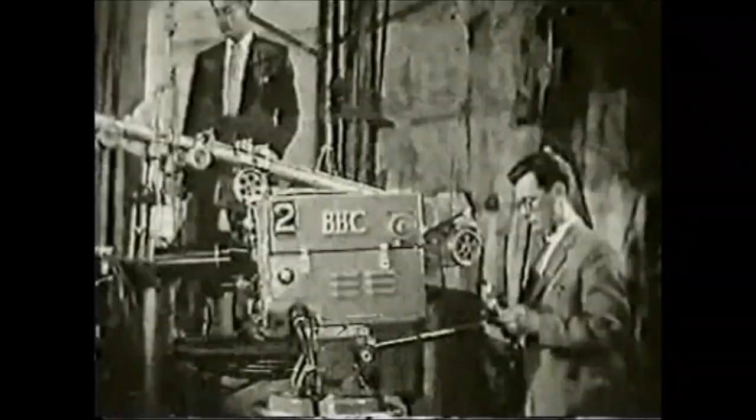The news is one of the most widely viewed items in the day's program. Events of international importance, and some of rather less importance, but no less interest, are collated, edited, and broadcast in sound and vision to keep you fully informed of up-to-the-minute happenings in the world around us.

Right. Cue caption scanner. Cue tape. Standby 1. Fade up 1. Fade down scanner. Here is the news. There have been several political developments closely affecting Western Germany in London, Washington, and Bonn.

Sometimes the seemingly less important news items are overshadowed by world events and lose some of their impact by their essential brevity. Take the next news item, for example.

Television viewers in the south of England will have improved viewing, and the signal will have an extended range, for as from today there comes into operation the new television tower at Crystal Palace.

The Crystal Palace and the new television tower. This simple announcement begins the story of a tower that rose like the legendary phoenix from the ashes of its own past. The Crystal Palace was a highlight in the history of the mid-Victorian period and had a very positive effect on art, commerce, and popular entertainment in its time.

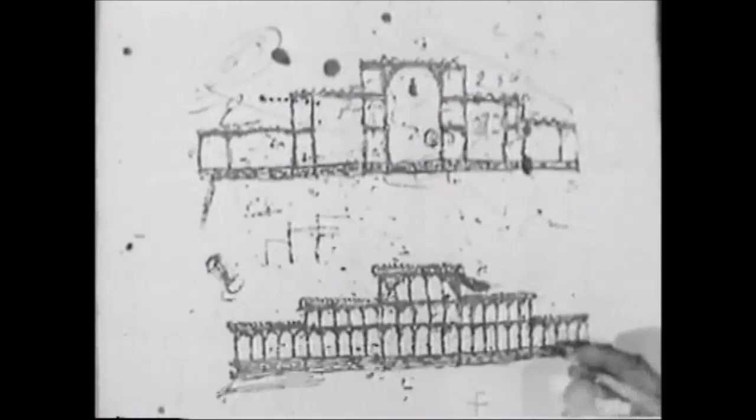The original design, rather like a vast conservatory, evolved from a blotting paper sketch made by Sir Joseph Paxton, an expert in the use of glass in construction work. Prefabricated iron sections were used to support the glass, and the work was completed within a few months. By any standards, the building was a remarkable piece of engineering, and in 1851, it seemed almost a miracle.

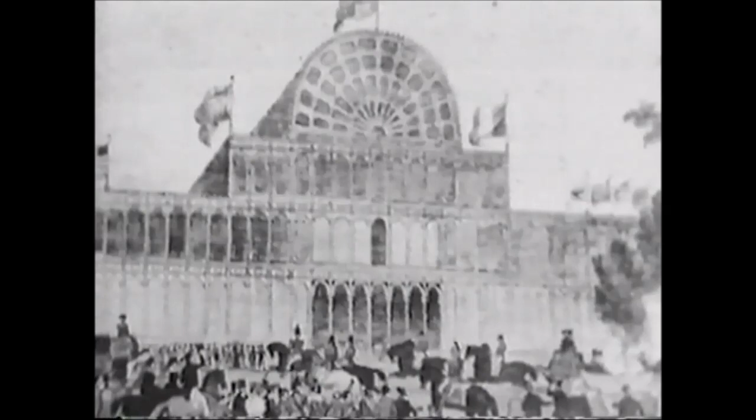Paxton had vision. Modern designers have referred to this building as one of the first successful examples of functionalism in architectural design. After the great exhibition was over, the structure was taken to pieces, considerably enlarged, and re-erected on the highest ridge of the Sydenham Hills. And so the Crystal Palace became nationally famous and one of London's most notable landmarks.

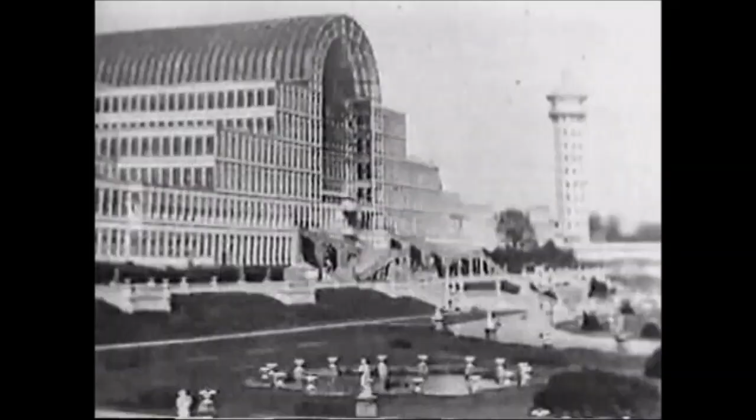But times change, and popular taste in entertainment changes with the times. By the early 1930s, the palace had lost much of its popularity. New forms of entertainment had sprung up, and about this time, a new word was coined: television. A pair of water towers, 280 feet high, had been added soon after the palace was re-erected at Sydenham. On one of these towers, experimental television aerials appeared.

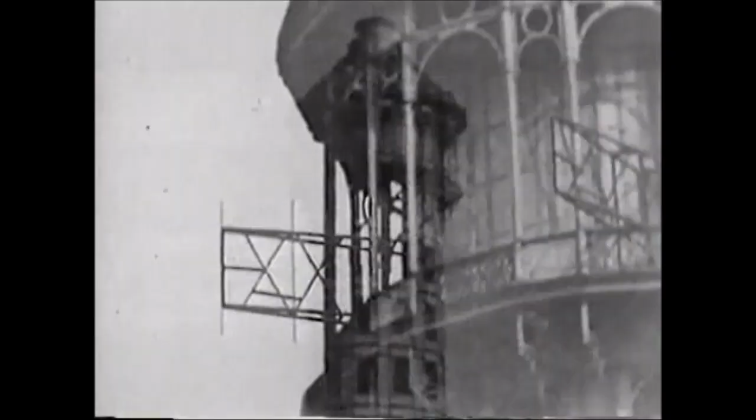In this way, the Crystal Palace, center of popular entertainment and education for more than 80 years, became the center of early experiments with a brand new medium of expression. But not for long. One evening in November 1936, the building was totally destroyed by fire. The association of the Crystal Palace with television was over for many years to come.

18 years after the fire, the site was still derelict. The deserted gardens remained a clutter of broken stonework, dismantled railings, and weed-grown subways. And all that remained of the North Tower was the creeper-covered brickwork of its foundations.

Ironically, Alexandra Palace, built as a rival center of entertainment to the Crystal Palace, became the headquarters of BBC television in London, and until 1956, all transmissions broadcast over London and the southeast went out from these aerials. In 1946, the station at Alexandra Palace had recommenced transmissions, and the BBC started on its plan to extend the television service to other parts of the country.

A very large area of the Midlands was to be covered from the first of the new high-power transmitters at Sutton Coldfield, near Birmingham. With the completion of the BBC's second high-power station at Holme Moss, near Huddersfield, some of the northern counties were to be linked with the Midlands and the south. Next, a large area of the lowlands of Scotland was to be included, followed by most of South Wales and part of the West Country.

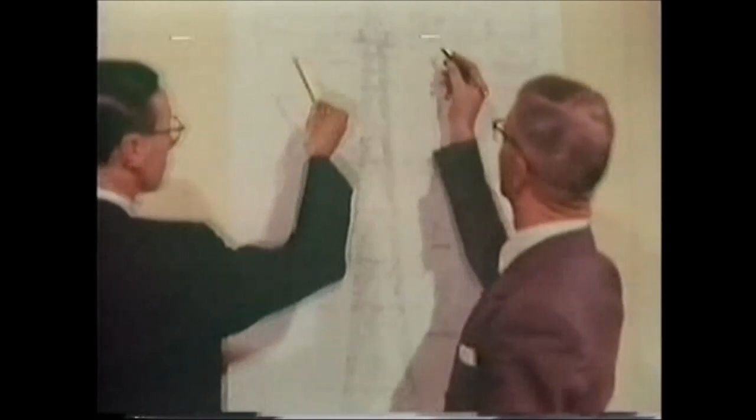As soon as the site had been chosen, work began on the design of the new tower. At other BBC transmitters, stayed masts had been used. But site restrictions precluded the use of a mast at Crystal Palace, and it was therefore necessary to build a self-supporting tower. This form of construction is more aesthetically pleasing, an important consideration for such a landmark so near London, and the design received the approval of the Royal Fine Art Commission.

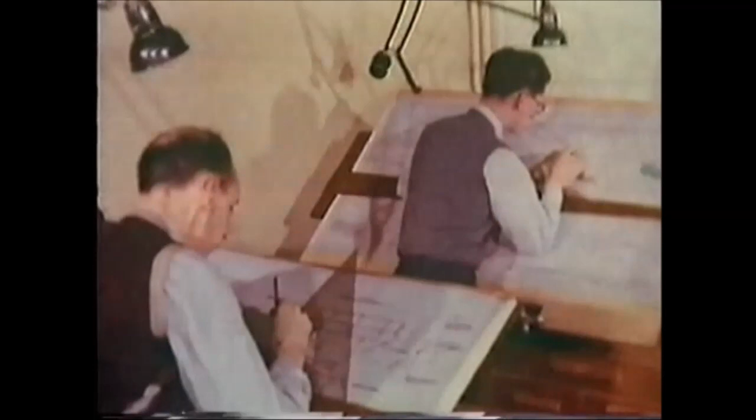As the design calculation progressed, more and more work had to be done in the drawing office, preparing detailed drawings for the whole tower. At this stage, tests were carried out by the National Physical Laboratory and by the Imperial College to determine the aerodynamic stability of the tower. For the purpose of tests, scaled sections of each of the aerial carrying parts of the tower were made. These sections were subjected to extensive tests in the wind tunnel.

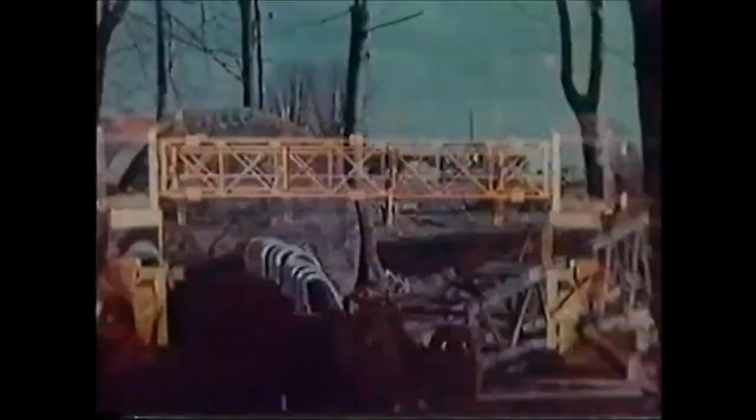The airstream in the wind tunnel caused the models to vibrate, and in this way, knowledge of the behavior of the structure under various wind conditions was obtained. Now, with the site cleared, the work of construction began. First, the area had to be accurately surveyed and marked out. Construction plants began to arrive on site. Work had already started on the lower terrace, where the new underground transmitter building to house the electronic equipment was going up.

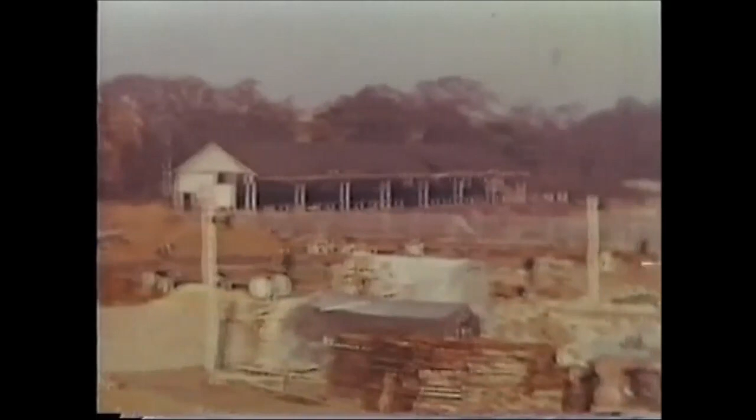Piles had to be driven to support each of the 4 legs of the tower, but because the transmitter building was being constructed close to and below the site, vibration had to be minimized. This factor was taken into account in deciding the method of piling to be used. The 4 concrete foundation blocks were to be set 120 feet apart. Each leg was to be supported by 6 vertical and 3 raking piles capped by reinforced concrete. These concrete pads were to be 14 feet square and 4 feet thick. The piles would have to be driven to an adequate depth to support solidly the 4 splayed legs carrying the immense weight of the completed tower.

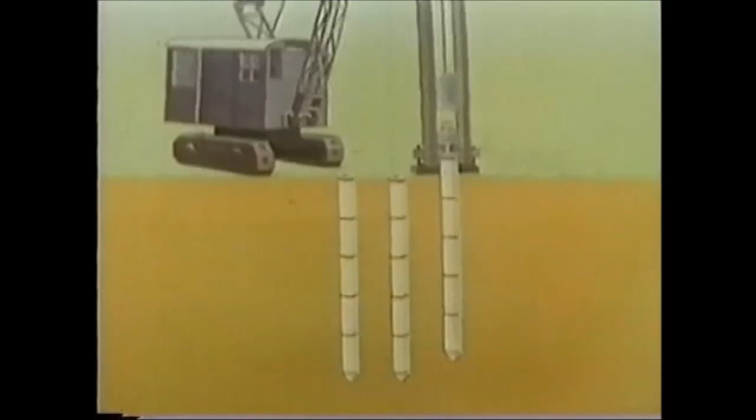Below ground, the piles would look like this. In driving each pile, the concrete shoe attached to the mandrel forces its way into the ground, and shells are fitted one above the other as driving progresses. Each blow of the hammer sinks the assembly deeper into the ground. The ground below this site is formed of London clay. The construction engineers decided that the pile should be driven to a predetermined depth where the clay becomes stiffer and more resistant. When each pile reaches the required depth, a steel reinforcement cage is dropped in, and the shells are filled with concrete, forming an unstressed solid core.

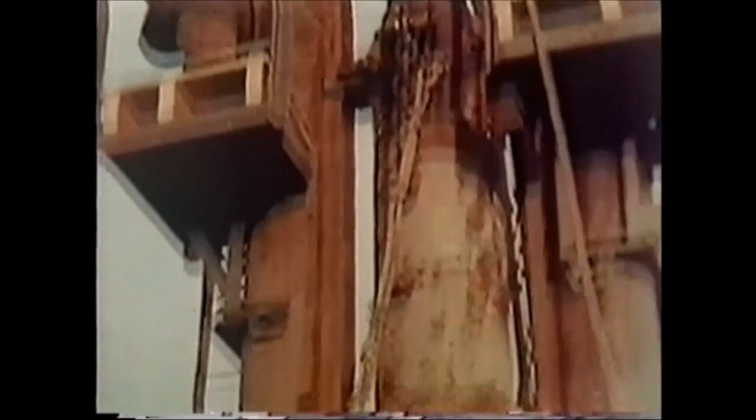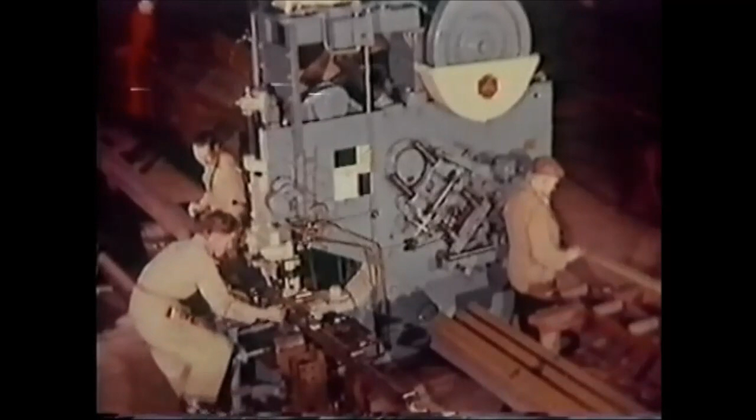While the work of piling was being done on the site, a great deal of important work for the tower was going on more than 100 miles from London at the works of another member of the BICC group. The whole of the steelwork for the Crystal Palace Tower was fabricated at this extensive factory in the city of Hereford, where they specialize in the production of lattice towers and masts and of unusual structures such as the new tower. This factory isn't at all the dirty place you'd expect a steelworks to be. 35 years' experience has proved that only under such ideal conditions is it possible to attain the high standard of workmanship necessary for erection on site to proceed smoothly.

The work done in the factory is checked in the black, that is, before the metal is galvanized. Here, one complete leg section has been assembled on the ground so that inspectors can check it from end to end before it goes along to be galvanized. Every section of the tower was put together for checking in the same way.

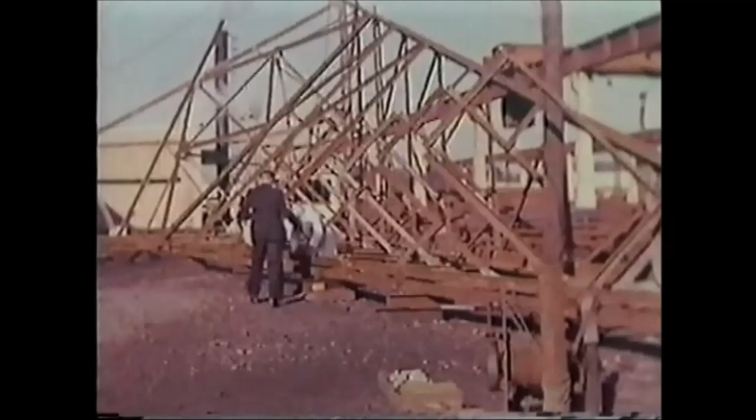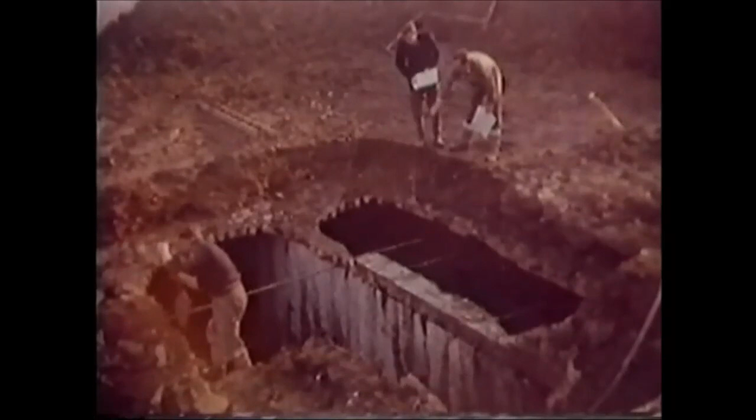Back on site, the work of piling was being finished off. Some of the century-old foundation work of the Crystal Palace was discovered when the site was being prepared. Piles were to be driven here, so this area would have to be filled in and made good. Steel grillages fitted with heavy-gauge bolts to hold the base plates in position had to be emplaced and concreted within the 14-foot pile caps.

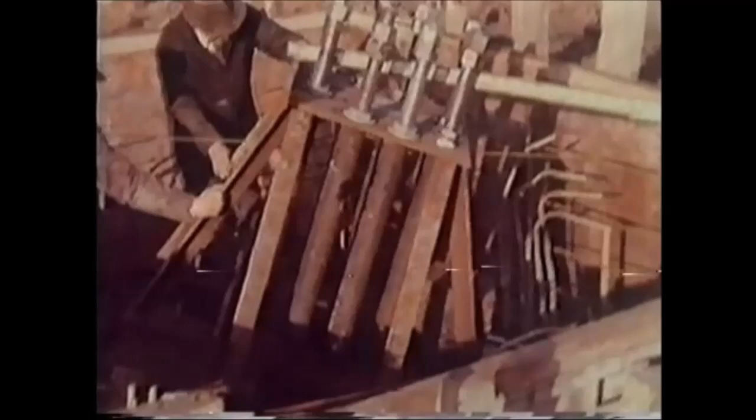With its grillage emplaced, each pile cap was to be built up with reinforced concrete. Great care had to be taken to avoid throwing the base plate bolts out of position. Foundation work continued during the winter months. The work went on in some of the worst weather of the year. Only the most extreme conditions of frost and snow slowed down progress on the site during that first winter.

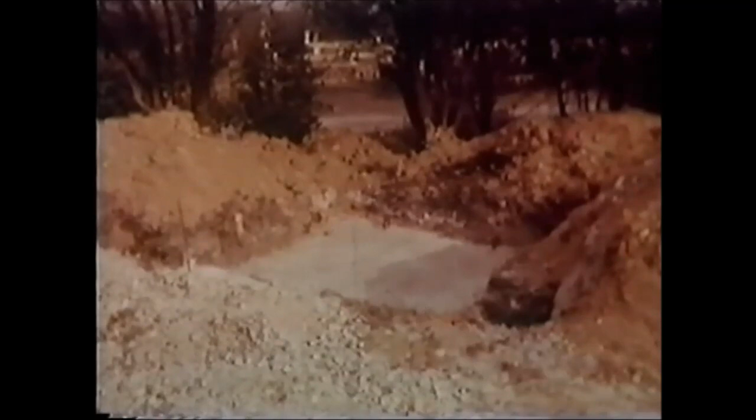By the end of the winter, the site had been prepared for construction above ground level. A number of temporary concrete blocks had been emplaced, ready for guy ropes to be attached. In the center of the site, a derrick 230 feet high was erected. This derrick was built up of 20-foot welded sections, and 2 derrick poles were temporarily attached to the top. Each section was winched up to be manhandled into position and bolted on.

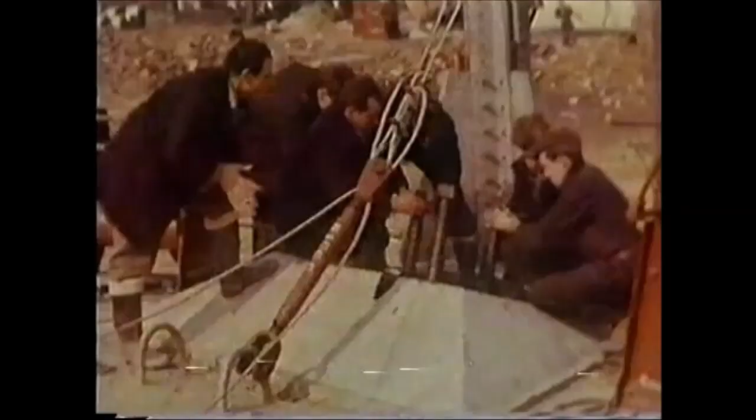By now, the construction team were ready for the base plates. Each leg of the tower was to depend upon one of these thick steel base plates for its strength, and their production involved a good deal of specialized study at Hereford. When the component parts had been cut to shape and holed, they were rigidly mounted in a jig for welding. The jig can be revolved in order that the operator can deal with every joint in turn and work at any angle that is most convenient and efficient.

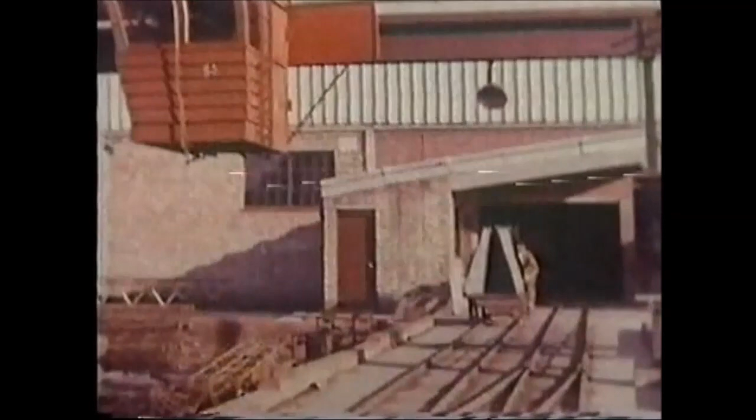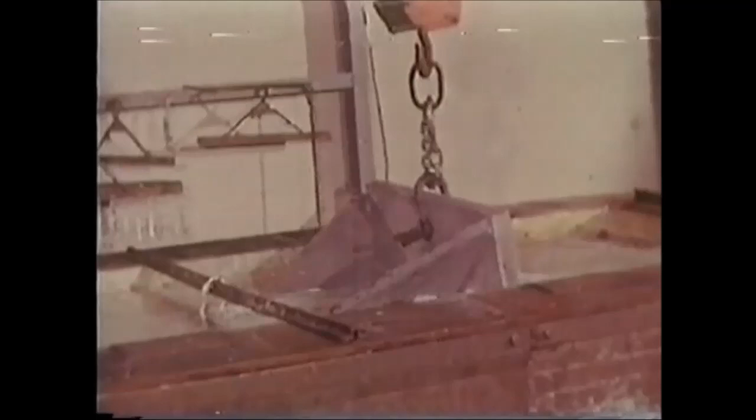As soon as it has cooled off, the base plate is shot blasted to remove weld slag and taken straight into the galvanizing shop, where it has to be properly cleaned in acid, or pickled as they call it, before galvanizing. Galvanizing is simply coating steel with pure zinc, and to do this, the work is immersed in a bath of molten metal. But the protective coat you get by doing this is different from a coat of paint. Broadly speaking, molten zinc and steel act together, and the final covering is a layer of zinc firmly bonded to the steel base by an amalgamation of the two metals.

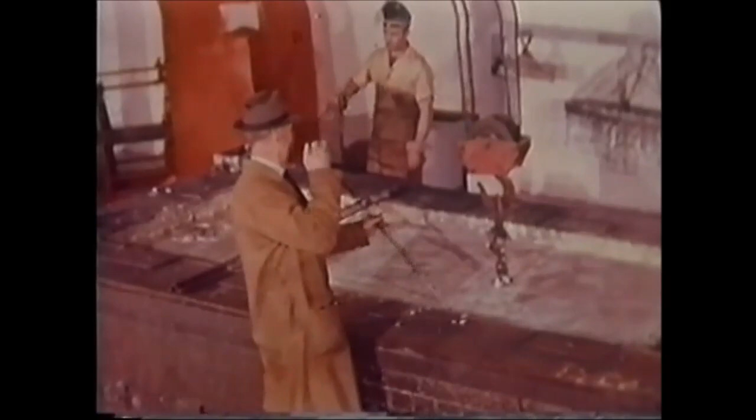The base plate is left in the bath for some minutes, and the surface is cleared of oxides to avoid contamination of the work. When the expert who controls the operation decides it's ready, the base plate comes right out and is drained. The high standard of accuracy insisted on at the factory ensured that the base plates fitted perfectly on their bolts at site.

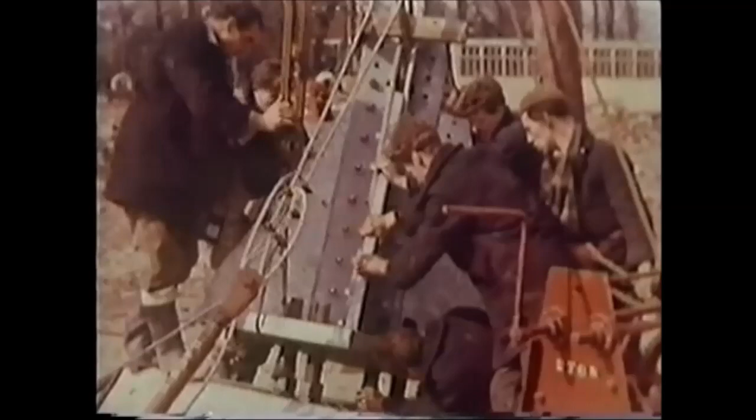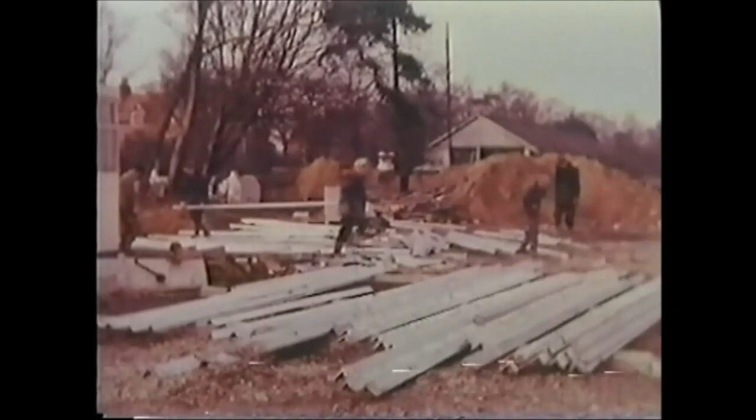When the 4 base plates were in position, an important phase in the work of construction had been completed, and everything was now ready for the erection of the lower panel to a height of just over 80 feet. Already, the angle steel for the main leg sections had begun to arrive at the local rail depot. On site, the metal was being sorted and stacked. Many hundreds of small plates and shaped sections were needed for the job, and thousands of nuts and bolts and washers.

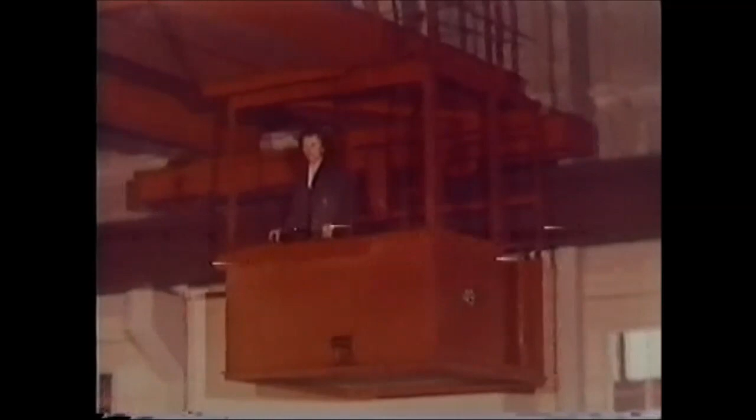The fabrication of steelwork for the body of the tower had been going on for several months. At Hereford, the special high tensile steel came into the stockyards from the rolling mills in increasing quantities. After it had been checked and inspected, it was fed into the production shops where the cranes, driven by girl operators, were ready to take over. But long before the steel left the rolling mills, the template makers set to work drawing down the tower full size from the designer's details.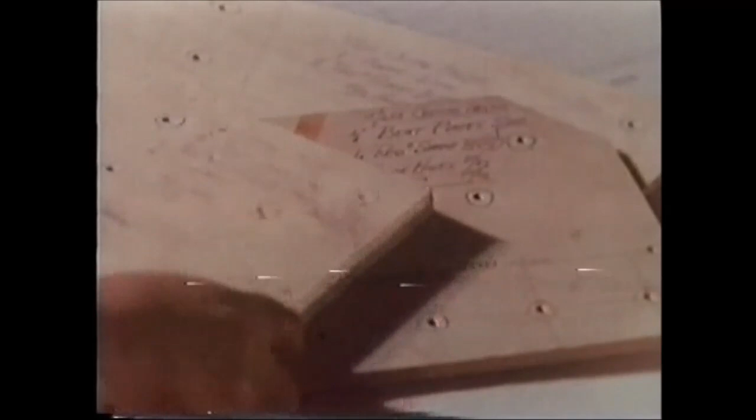Wooden templates were made for every piece. These templates are a special type of pattern carrying full instructions for marking off and used by men in the fabricating shop. One of the markers off checks the details. He then scribes the bar for length and after writing up the instructions in chalk, sends it across to the saw. Slowly but surely, this powerful machine cuts its way through the metal.

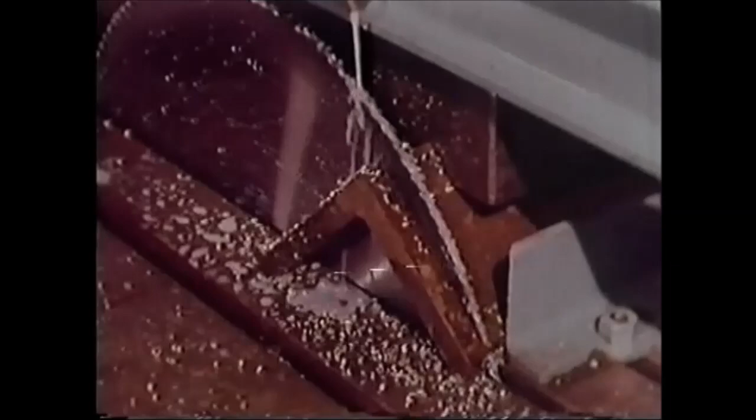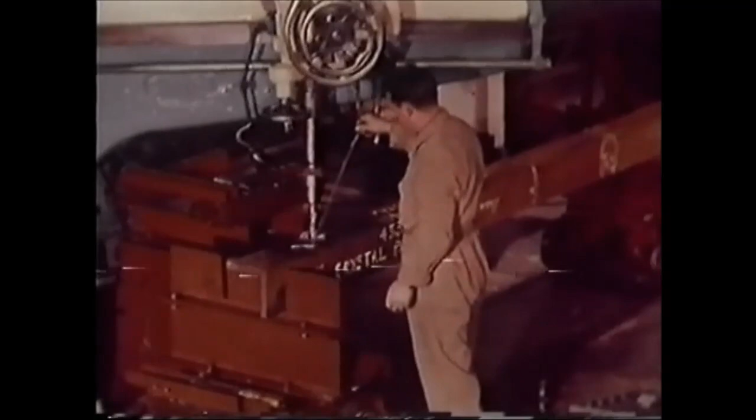After the members have been cut to length, the bolt holes have to be put in them. With the lighter bars, the operator presses the treadle with his foot and the holes are punched out cleanly in one stroke. Because they are much thicker, the heavier bars have to be drilled. This leg section member is nearly an inch thick and weighs over half a ton. The operator is drilling a pilot hole to fit a jig set on the bar.

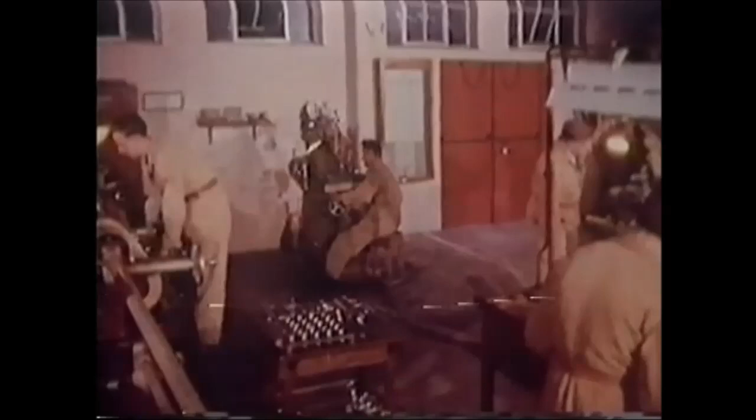All the important drilling is done through steel jigs, which are made in the tool room by skilled craftsmen. These jigs take the place of the wooden templates and have holes of the right size at exactly the right spacing through which the drill actually passes. Each jig is inspected and tested before being passed for service. To use a jig set, the operator pegs it into the pilot hole already made and runs the bolt holes in exactly where they are required.

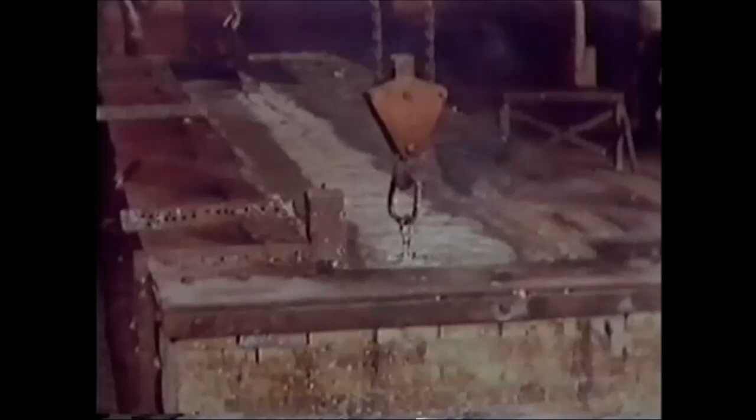Cut, holed and stamped with their identification numbers, the bars go into the galvanizing shop for pickling and dipping. The longest bars of all were used for these main members, but some of them were too long to go in all at once and had to be dipped in two operations, first one end and then the other. Covering up the join needs experience and skill, for there must be no unevenness in the final coating.

The skimming hands repeatedly boil up the molten metal with their paddles to give a washing effect on the bar. Also, they clear away the zinc ash, which continually forms on the surface of the bath. As with the base plates, the lifting operation is carefully controlled when the time comes to take the bar out of the pot. When each bar is laid out on the trestles alongside to cool, it's carefully inspected for blemishes or faults.

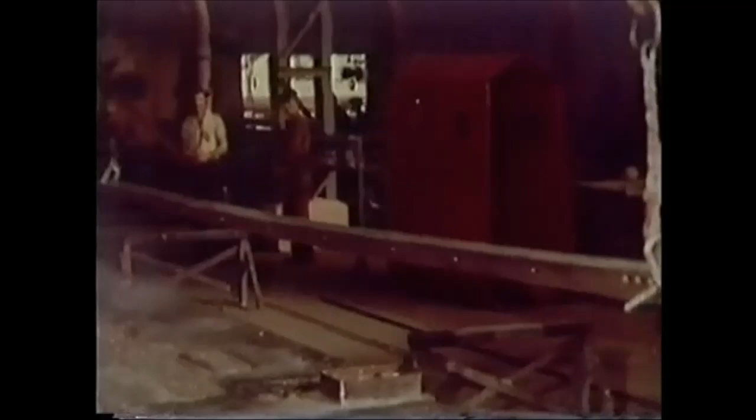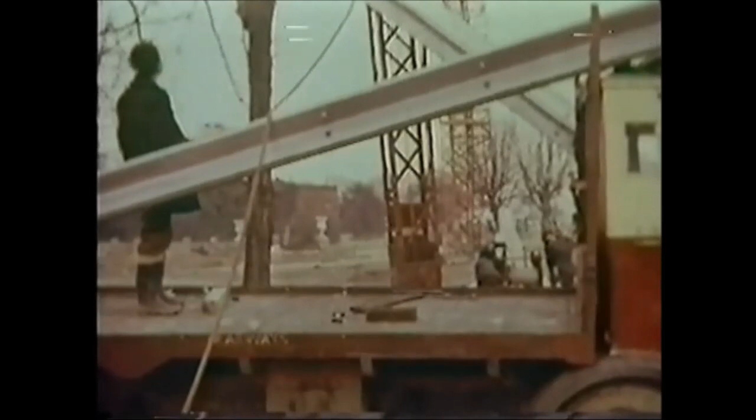For the construction of the Crystal Palace Tower, 450 tons of steel were fabricated in this factory, and for many months, load after load was transported by road and rail from Hereford to the site in London. The heaviest sections to be handled on site were the leg members. These consisted of 4 angles bolted together, making a cruciform shape. This shape added strength to the structure and made the best possible use of the standard heavy angle steel sections.

The beginning of steelwork erection is always a critical period for the construction engineers. Close liaison between the designer and site staff is of the utmost importance. The method of erection of the bottom panel was now fully discussed. In the first few weeks, all the detailed planning and the accuracy of the steel fabrication will be put to the test. On site, the first main member of leg number 1 was lowered onto the base plate.

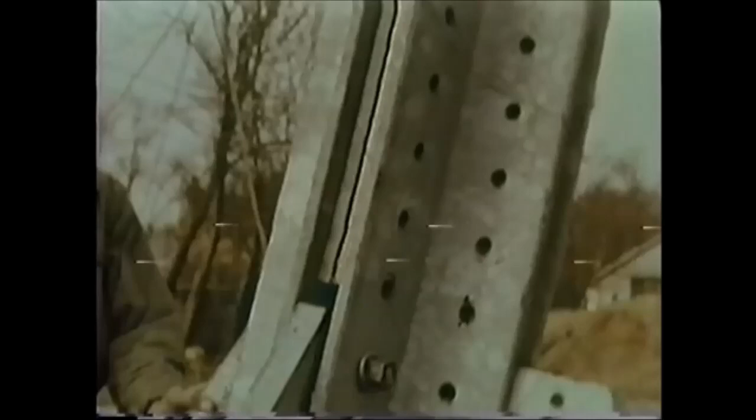Some of the bracing members were partially assembled on the ground before being hoisted into position. Progress was constantly watched by the design and construction experts. Many months of planning and paperwork now began to take tangible form. A complete span section was assembled on the ground and taken up to bridge the gap between the first 2 80-foot leg members. A 125-foot derrick was used to hoist this large assembly into position. This derrick was afterwards to be used as a floating derrick.

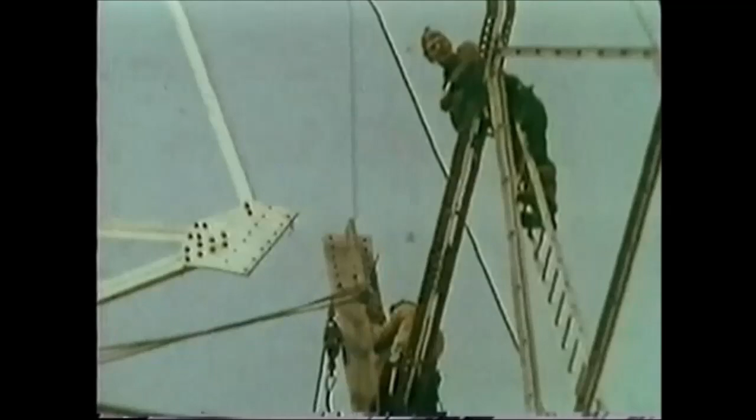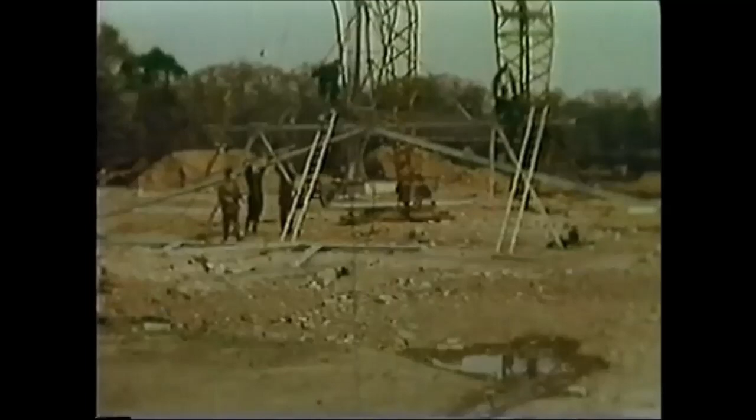From now on, the men of the construction team spent most of their working days aloft and getting higher as the days went by. When all 4 legs were standing up, the most difficult job on the lower panel had to be tackled, the bridging of the last gap between the leg sections. The span was already assembled, ready for hoisting. The designer and the site engineer had to go through the detailed drawings and discuss the closing of the gap.

Up went the assembled span, carefully steadied and guided by the men on the ground. Bridging the last gap of the first panel was a critical operation, and its final success proved that the foundations had been set out with the utmost precision. Again, the detailed drawings had to be checked in preparation for the next stage of construction. The first panel of the tower was complete to a height of 80 feet.

Now, to enable the second panel to be erected, the 125-foot derrick was floated on steel ropes high enough to enable it to be used for hoisting the steelwork above the lower panel. From this stage, the 125-foot floating derrick was used for all construction work until the 440-foot level was reached, when a 45-foot floating derrick was to take over.

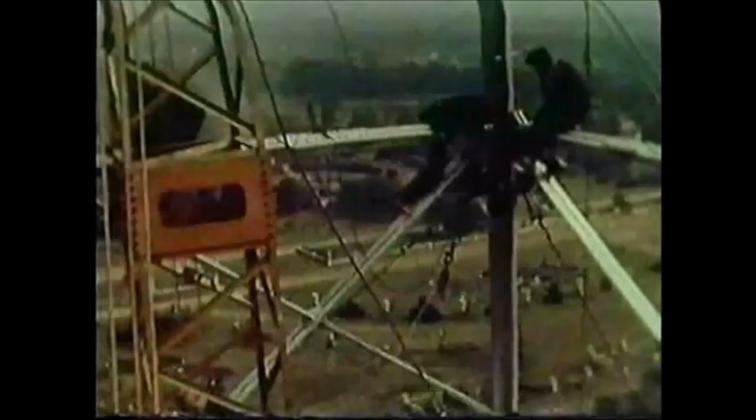The second and third panels were to be erected on similar lines to the first panel. In each case, the main leg was fixed into position, followed by the bracings, until a whole corner of the tower was complete. Temporary steel wire ropes held each corner until all four were connected together. Every section fitted perfectly within the framework of the structure. This was due to the extreme care taken by the steel fabricators during manufacture. In effect, the work on site became a daily routine job: assembling various sections on the ground, preparing them for lifting, hoisting them to the required height, and bolting them into position.

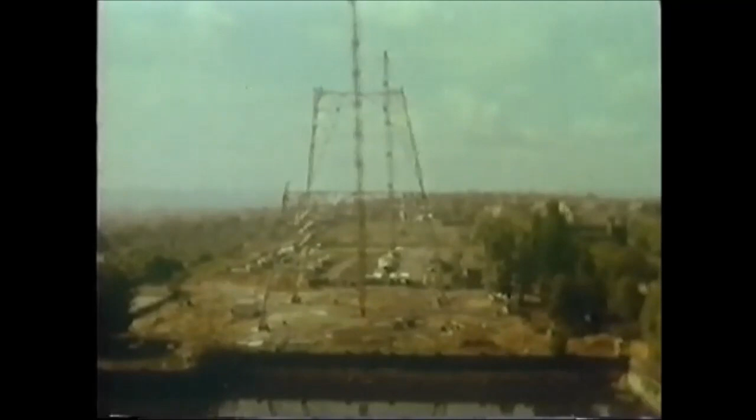By now, the periphery platform at the 150-foot level had been completed. The tower had reached a height at which the 125-foot derrick could no longer be used, and so it was dismantled and taken away from the site. Even at heights like these, the construction team work as unconcernedly as they did when the first leg member went up.

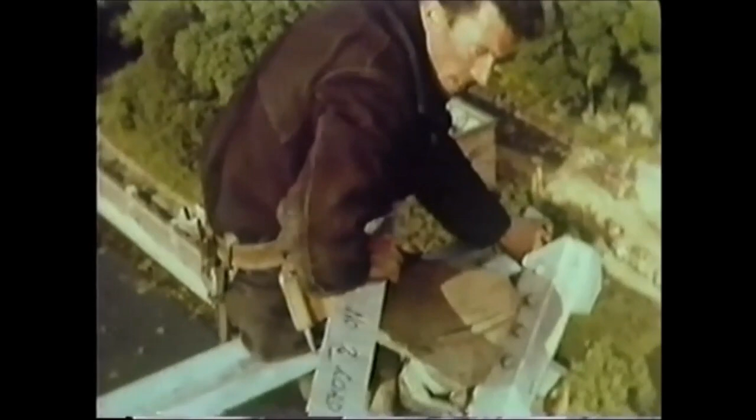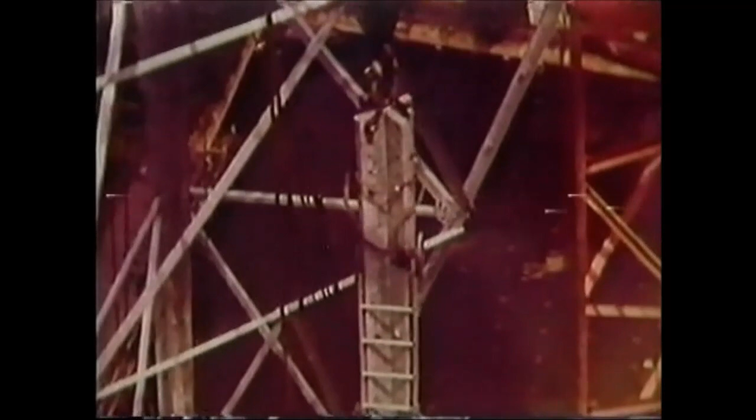The tower is similar in shape to the Eiffel Tower, up to 440 feet. All the way up to that level, cruciform angle steel was used for the main leg members. This was one of the last straight cruciform sections to leave the ground. Normally, the higher the lift, the smaller are the loads handled. However, such was not the case during the erection of this tower. Loads of 3 tons were handled up to a level of 500 feet, and later, a load of 2 tons was carried right to the top of the tower.

To control the dropping into position of each main leg member, whistle signals were given to the winchmen on the ground. Moving the floating derrick into position for use at these high levels was a job which had to be delicately handled. The head and base of the derrick had to be pulled over and raised by ropes attached to 8 hand winches operated from the ground.

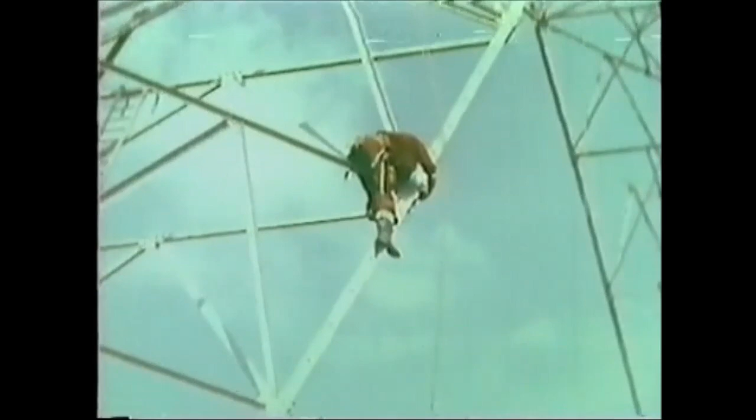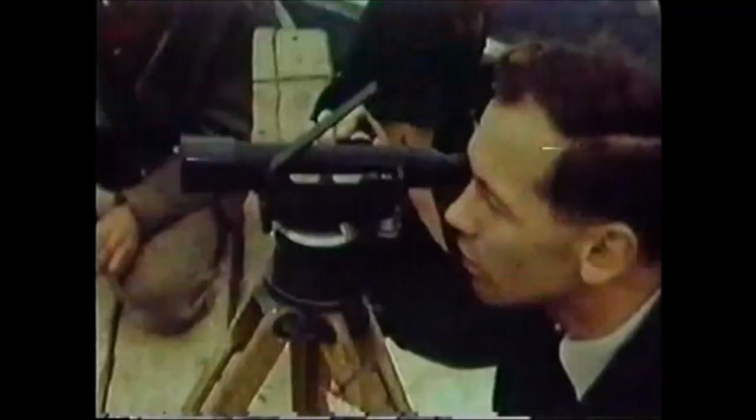As the derrick was raised, so the tower grew. The construction team had to take advantage of every minute of good weather to tighten up the nuts and bolts in the splices of the bracing members and generally to consolidate the work already done. When the tower had grown to 400 feet, the surveyor set up his instruments on an improvised platform at the top to check the accuracy of the construction work so far completed.

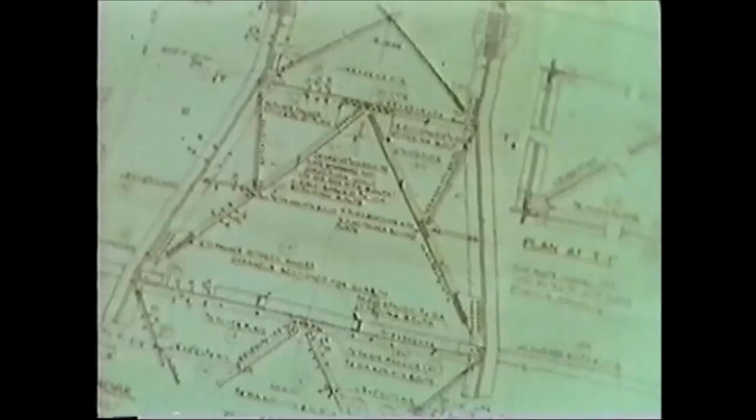Construction up to the 440-foot level was now nearing completion. From this level to the top, the tower was to be built up of parallel sections designed to carry the greater part of the aerial array. At 429 feet, the design provided for the first of 2 bends in the angle steel leg members. A second bend in each section at 440 feet would narrow the tower to 9 feet 6 inches square.

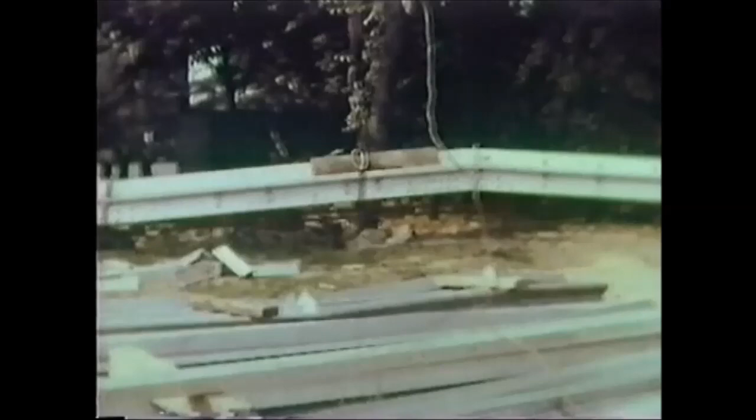At the first of the double bends, a platform is to be built. The main aerial carrying part of the tower is above the platform, and from this point, aerial design requirements were a main consideration in determining height and width. This level also marked the transition to rod section from angle steel. These 4 bent leg members were the last angle steel sections to arrive on site. With these sections in position, the structure would have reached 440 feet. The bent angle sections went up.

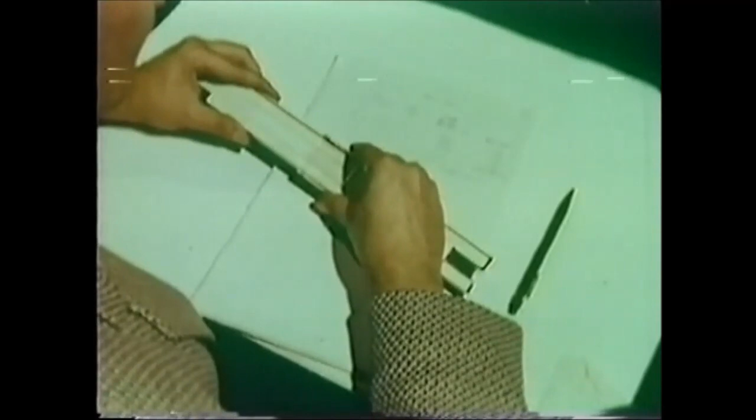But at this stage, the construction company were asked by the BBC to stop all work above the 440-foot level, pending modification in the design to make provision on the tower for additional aerials required by other services, which the BBC had undertaken to accommodate. The top part of the tower had to be redesigned completely, for roughly twice the number of aerials were now required. The designer was faced with the problem of an increase in height, without any drastic alterations to the supporting structure. Loading now became the governing factor instead of the deflection of the tower.

The principal changes in design were to increase the height of the structure from 640 feet up to 708 feet. Detailed alterations to accommodate changes in the aerial array were as follows. To fix additional Band 1 aerials on the supporting structure between the 350 and 419-foot levels, to make the upper Band 1 section 72 feet in height, above this to allow for 2 sets of Band 3 aerials instead of 1 Band 1 aerial, and to fix an aerial required for the BBC's experimental transmissions in the ultra-high frequency Band 5, right at the top of the tower, bringing the overall height of the structure to 708 feet.

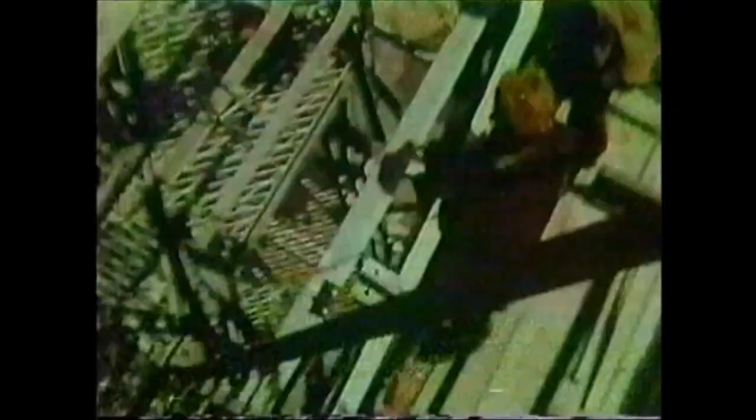While the top section was being redesigned, construction work on the tower continued. Above the 350-foot level, bracing members were strengthened and new platforms built.

Cable trays, to support about 40 different cables, ran up on one of the legs, and the next step was to fix the additional Band 1 aerials on the supporting structure below the 400-foot level. These aerials were to be used for transmitting the BBC's programs until the Crystal Palace Tower was working at its full power.

A permanent hoist was needed to convey the BBC engineers to a point from which the aerials could be serviced and maintained. This hoist was designed in such a way as to fit into the framework of the tower without spoiling its appearance. The hoist was constructed to run up to a platform just below the 400-foot level. Guide rails were fitted inside one of the legs of the tower to carry the passenger cage.

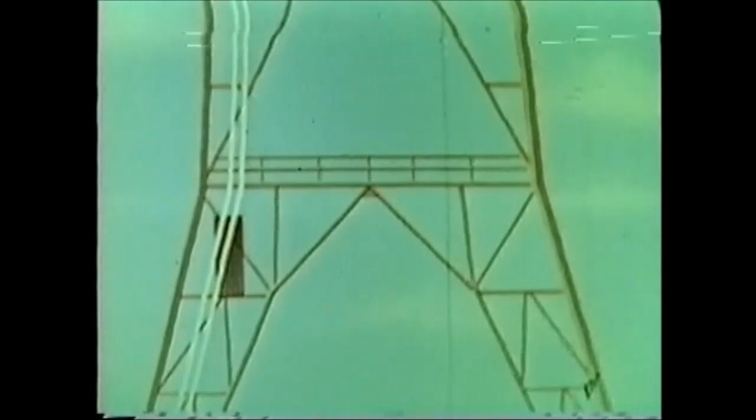An unusual feature in the design of the hoist is the way in which the cage changes direction slightly at the bend points, but still remains vertical right up to the top of its travel. In due course, the testing of the hoist was successfully completed. From the construction engineer's cradle, the tower now looked like an enormous spider's web.

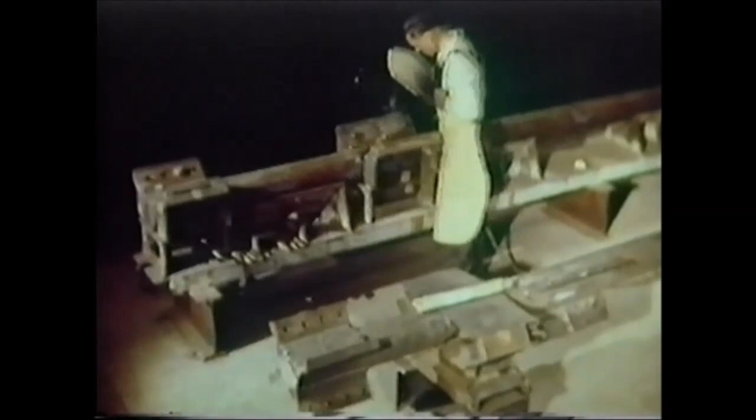And now only the redesigned top section remained to be built. From the 440-foot level upwards, solid round section steel was to be used for the main legs. Lengths of 8-inch diameter, solid round, began to arrive on site, complete with gusset plates ready for erection. When these round sections were made, gusset plates with the bolt holes already in them were welded to all the leg members, not only to take the side bracings, but also to enable each length to be connected to the next one.

These connecting plates were assembled in a specially designed welding jig to ensure that they were all in the right place and lying at the correct angle when finished, and also to enable the welder to operate down the length of the bar with the work always at the most suitable angle for him to produce a perfect job.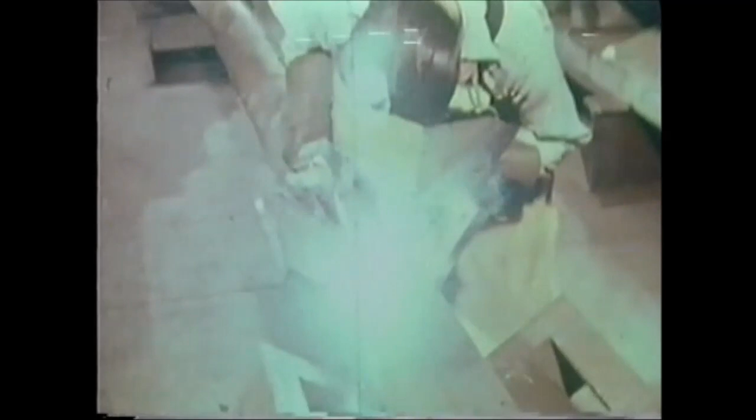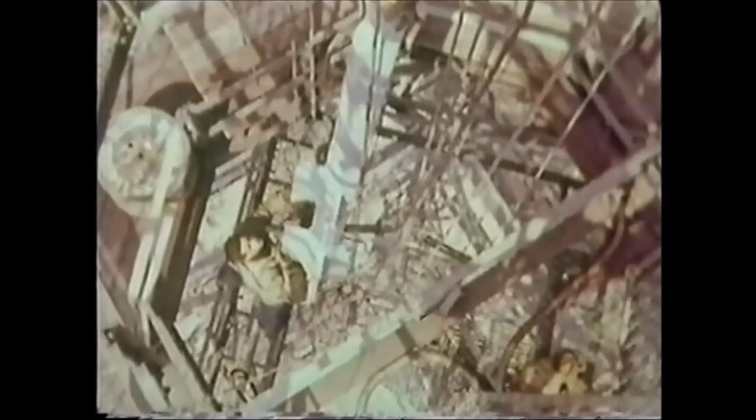On site, the final stage in the erection of the tower had begun. The first bar of the top section to be taken up was of 8-inch solid rod weighing, with its lifting tackle, over 3 tons. This first main leg was lifted within the periphery of the tower and threaded through several platform positions. Great care had to be taken throughout this operation, especially when the leg section was manhandled through the narrow aperture in the middle of the top platform.

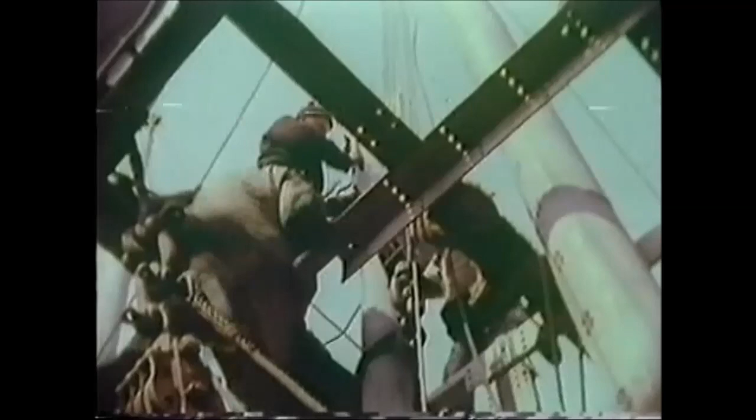Close supervision was necessary. The site engineer and the foreman left nothing to chance. Then the erection team took up their positions at the top of the tower to receive the new steelwork. A final check was made by the foreman, and when the leg was clear of the existing steelwork, the first round section was lowered into position, ready to be bolted on. Now the tower started to grow again.

The problem of continuing to build with the lower Band 1 aerials already in commission then had to be faced. All the steelwork above the 470-foot level had to be lifted outside the periphery of the tower to speed up construction. And so an unorthodox method of erection had to be evolved. At 429 feet, a special platform was constructed on which two 45-foot tubular derricks were mounted. The falls from these two derricks were operated from two winches working at ground level.

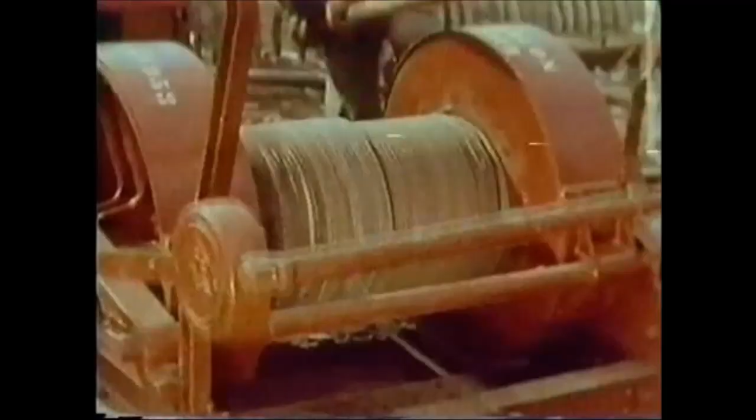The steel was lifted up to the erection platform and then transferred to the floating derrick fall. From this level, the steel was lifted by the floating derrick, operated from a winch working on the erection platform. By now, a helicopter was needed to enable the film record of the work to be completed.

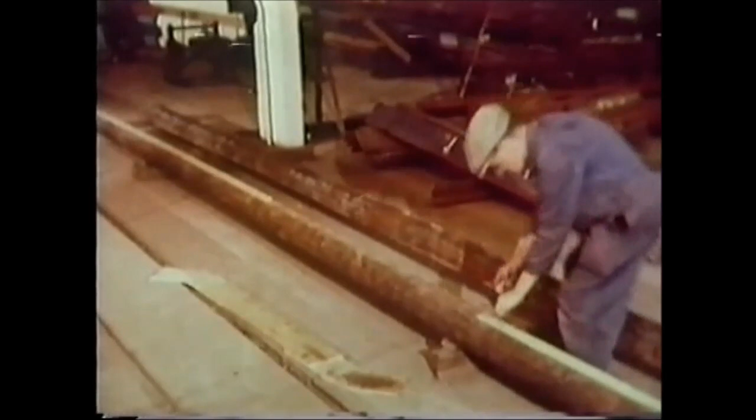At 2 points in the upper part of the tower, double bends had to be introduced into the 7-inch diameter solid round sections. Bending a steel rod of such a diameter is not easy. First, the position of the bends is marked on a bar from a wooden template before the bar is sent across to the smith's hearth to be heated. The bar is carefully tended by the blacksmith, who lets it soak in the fire until it is red hot right through. When it is ready, the bar will be swung across to the bending machine.

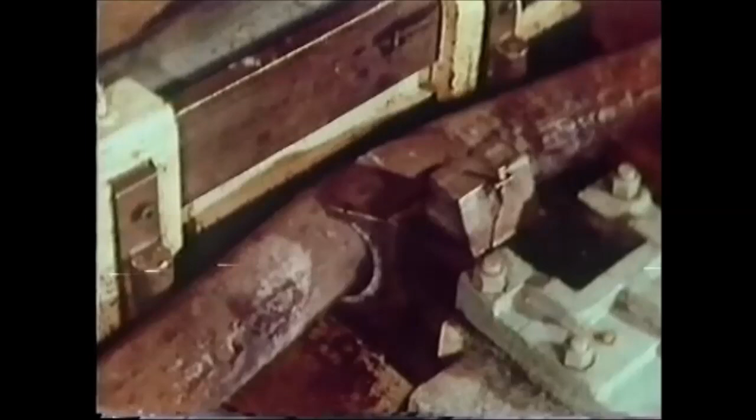Slowly, each bend begins to take shape as the operator brings the jaws of the press closer to the ram. These men become so experienced in this class of work that they can tell by eye when the right amount of bend has been put in. The wooden template is needed only as a final check before the bar is taken away from the machine to cool off.

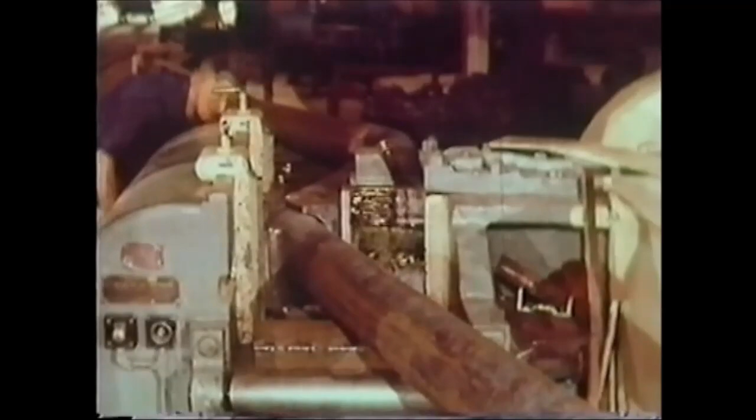On site once again, the work followed a normal routine. The sections were lifted off the ground and hoisted up to the erection platform. On the erection platform, the steel was transferred to the floating derrick. The steel was then taken right to the top of the tower to be dealt with by the erection team.

The construction of the upper part of the tower was unusually difficult because of the necessity of using a heavy derrick in a very confined space. Weights of the main leg sections were of the order of 2 tons each, and for this work, the specially designed outriggers were extremely useful.

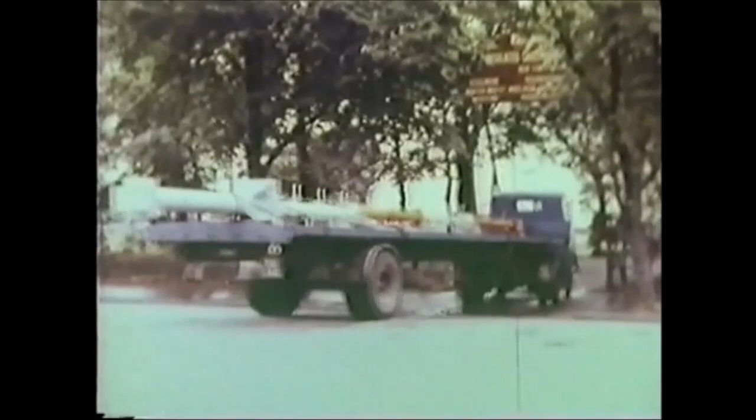Two 60-foot lattice derricks were assembled on the ground and taken up to deal with the topmost unit of the tower, the aerial required for the BBC's experimental transmissions in the ultra-high frequency Band 5. The two derricks were to be fixed on either side of the top of the tower to support between them the Band 5 aerial while it was being lowered into its stepping on the top platform.

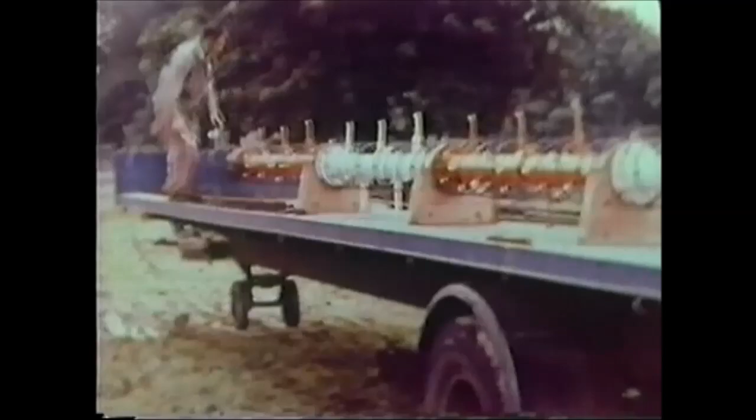The Band 5 aerial is mounted on tubular steel sections, making up a total length of 40 feet. Soft copper rod is coiled about the unit for the greater part of its length. When this aerial came to be hoisted, very special care had to be taken to avoid damage to the copper coil. By now, the top of the actual structure had been reached. The addition of the Band 5 aerial would bring the tower up to its final overall height of 708 feet.

And when all the constructional work had been completed, the helicopter took off to fly around the tower and bring back some unusual angles of this unique structure, the highest self-supporting tower in the British Isles. According to the usual custom among constructional engineers on such occasions, a Union Jack appeared, fluttering in the breeze from the topmost point.

All that remained to be done was the installation of the aerials on the various sections of the tower. The two sections immediately below the top platform were reserved for the two sets of Band 3 aerials. Upper Band 1 aerials were to be installed on this section of the tower above the main platform. And just below the main platform, the lower Band 1 aerials had been fixed and were already in use, transmitting the regular daily television programs.

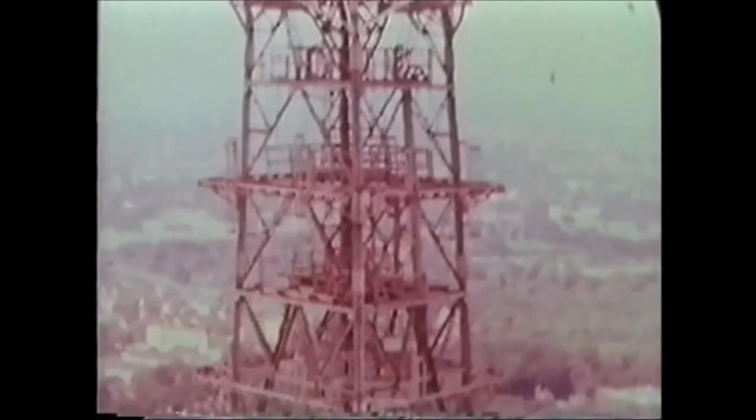The work of construction had been greatly simplified by the use of a winch and derricks high up on the tower, and this lifting arrangement was also used to install the aerial arrays. Within a short time of the completion of the tower itself, some of these aerials were already installed on all 4 faces of the structure.

After many years, the Crystal Palace is once more an important spot on the map. On the actual site of the old palace, the new Crystal Palace television tower has risen to broadcast entertainment and education in the modern manner. At this point, I decided to take another look at the finished job before the construction engineers left the site.

Ah, Mr. Ward. Meet Bob Danvers-Walker. How do you do, Mr. Ward? Glad to meet you. Mr. Ward is in charge of our special projects department. I would say that this certainly comes under the heading of special project. Yes, we had a number of problems to tackle. Oh, is that so? It's very interesting. Would you mind if I go up and record a few impressions? Go ahead and take the hoist. Thank you very much indeed.

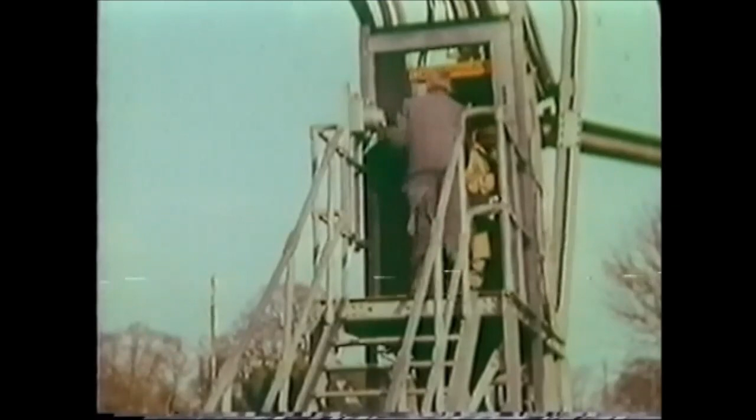And so I went up with Mr. Stewart, the chief overhead construction engineer, to the terminal point of the hoist, 400 feet up. Then we climbed up to the main platform at the 440-foot level. It was well worth the effort. Even on this rather gusty day, the view from this height was remarkable.

You know, to me, it feels as solid as the Rock of Gibraltar up here, but I suppose that's hardly surprising, since I'm standing on 450 tons of steel. What is surprising is that there is such a great weight of steel at the top of this slender tower. Theoretically, I'm told that if it were possible for me to sit on top of the Band 5 aerial at over 1,000 feet above sea level, I'd be able to see the coastline of Kent and Sussex. That is perfectly true.

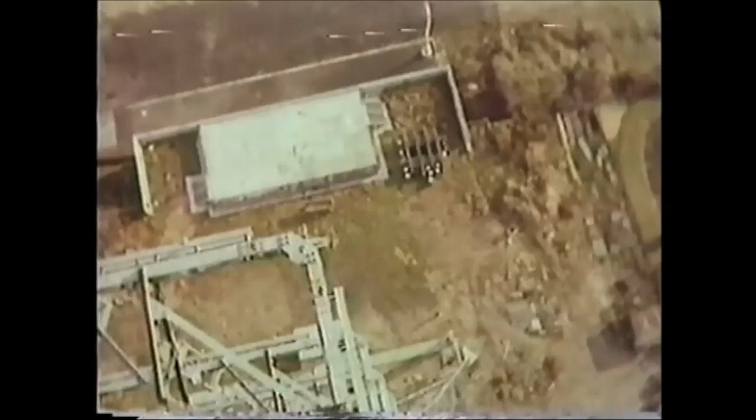Down below, I can just make out the blue flag of the BBC flying over the London television station building. It's strange to think that the old Crystal Palace stood here over 100 years ago, and that experimental television broadcasts went out from this spot until the fire in 1936. No wonder that the construction of this great tower has reminded some people of the legend of the Phoenix. And the Phoenix Tower is not only an achievement in steel construction, it is also a symbol of future development.